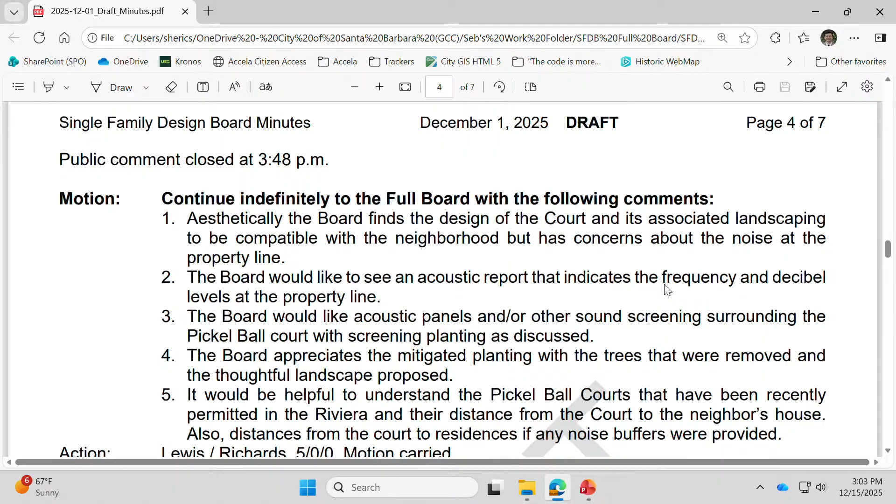Just let me know when to keep scrolling after you're done reading the motions. That looks good. Oh, I don't know, yeah. I'll second that. Oh sorry, we're going down to the other ones. Okay, to the other ones, okay. I thought that you were done. You can keep going.

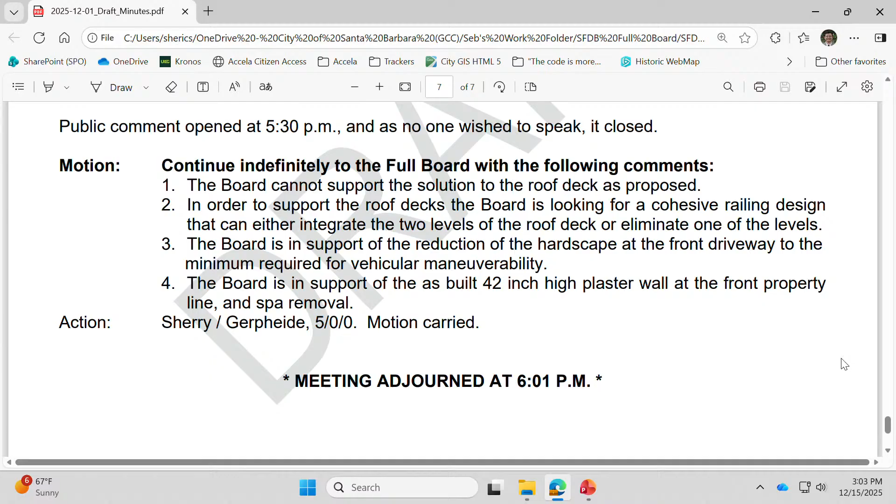Okay, I'll move to approve the minutes as noted for the December 1st full board meeting. I'll second that. Okay, we'll take a vote. Board Member Gerpheide, yes. Board Member Richards, yes. Board Member Moslehy, yes. Chair Lewis, yes. Vice Chair Sherry, yes. Motion passes.

Okay, next is the approval of the minutes from the consent meeting on December 1st.

That looks good. And that's it? Oh, one more.

Okay, I'll move to approve the minutes from the consent meeting on December 1st. I'll second. Okay, we'll take a vote. Board Member Richards, yes. Board Member Moslehy, yes. Board Member Gerpheide, yes. Chair Lewis, yes. Vice Chair Sherry, yes. Motion passes.

Next is ratification of the actions taken on the consent calendar for December 8th and December 15th.

I'll go ahead and read them from the full board agenda. Item 1 for the December 8th consent hearing, 529 De La Vina Street, was postponed to December 15th, so no action occurred at that hearing. For December 15th, item 1, 3179 Lucinda Lane, was scheduled for project design approval and final approval and was granted as submitted. Item 2, 45 West Sola, was granted project design approval and final approval as submitted. Item 3, 529 De La Vina Street, was also granted project design approval and final approval as submitted. Finally, item 4, 3022 Paseo del Refugio, was continued indefinitely to the staff hearing officer. That is it for the motions for those two days.

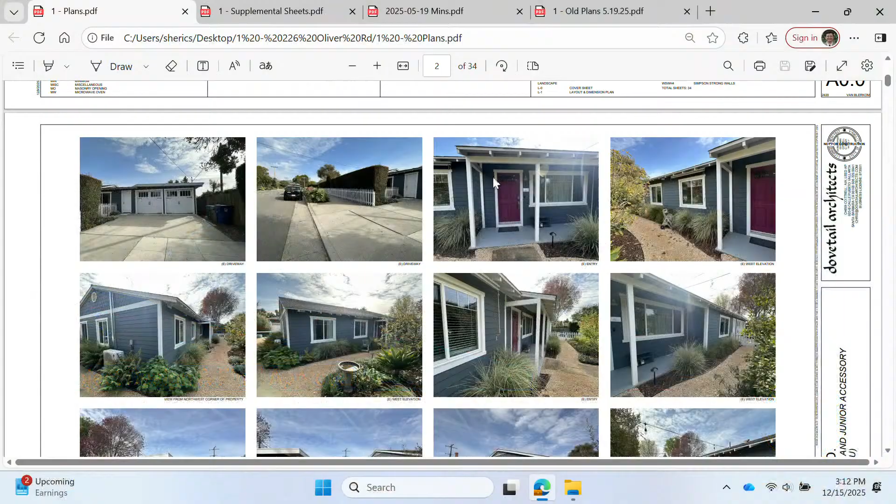So I can just take you through where we are, and then Katie can show you the minor landscape changes that we've got. Here's that existing entry. So posts are going to be in the same place, we just have a little cute little gable over that.

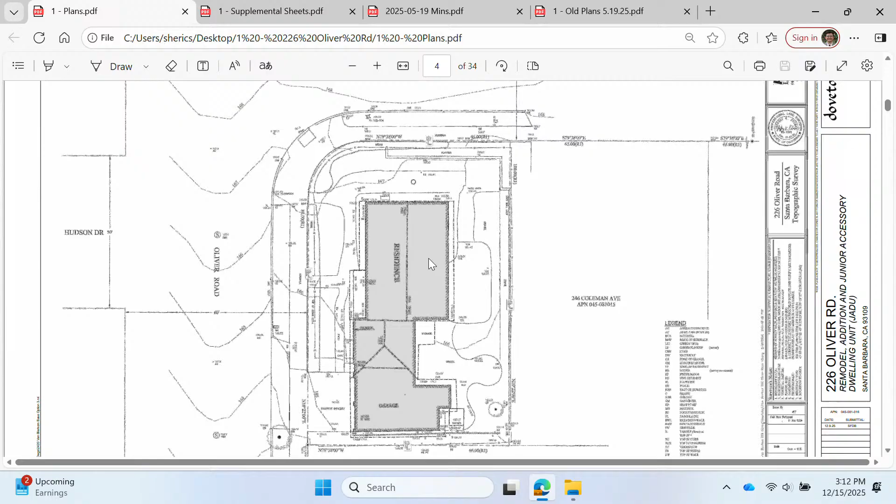I'll come back to this site plan. Well, do you have that other site plan? Yeah, I put it in the folder, it's in here, supplemental sheets? Yes, I got it, there you go. Wow, look at that. Perfect. Thank you. Yes.

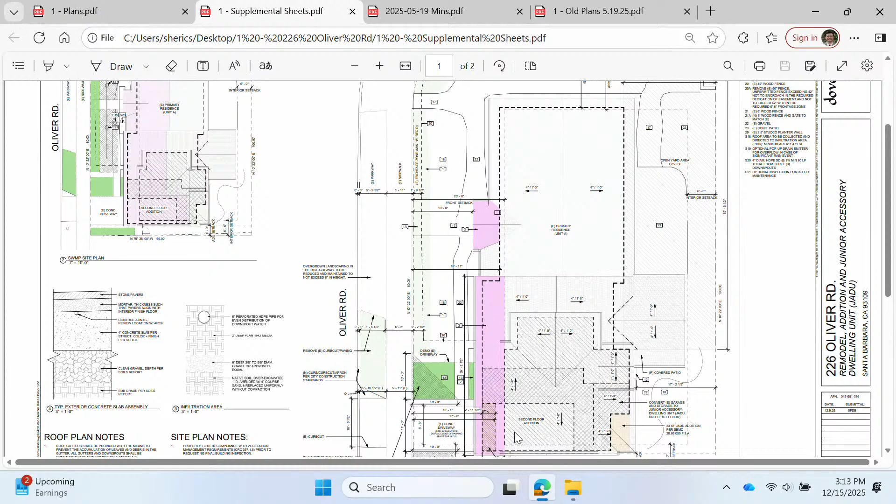I'll switch back to this other thing real quick. Okay, you can see that looked much better.

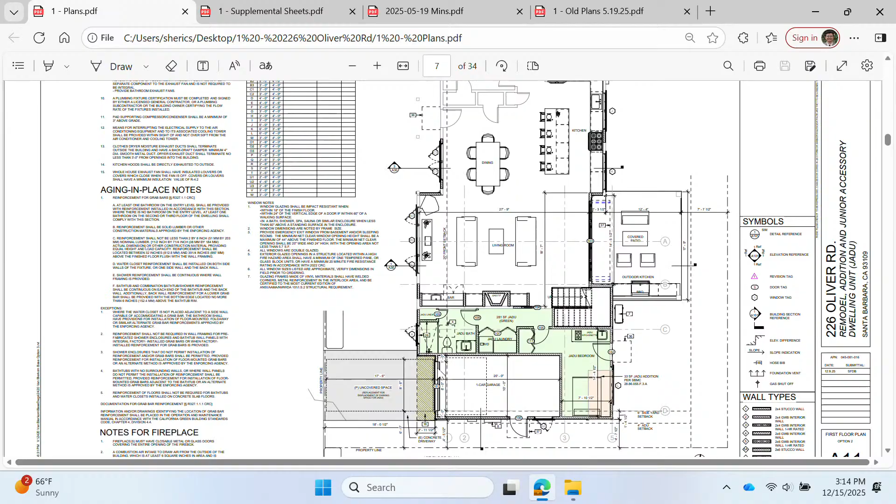Floor plans - we're doing a sort of infill addition at the back of the house, and then converting this 2-car garage into a 1-car garage and a funky JADU. And there's this other parking space in front, so there's that setback, you can see that push back there where we're getting that space. Adding a new stair up to the 2nd floor primary suite, closet, bath, bedroom. I think the last time the board was here, we had 3 by 3, and I think these have shrunk to 30 by 30.

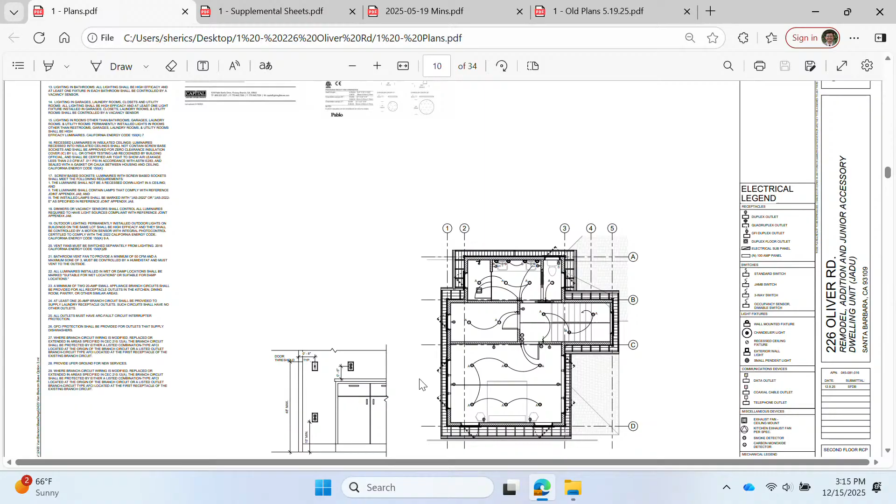RCPs. There was a comment from the folks on the opposite corner, kitty corner from this, about exterior lights, and I just wanted to show them that there are actually no exterior lights proposed on the 2nd story. There's no deck or anything on the 2nd story, so just wanted to allay that concern.

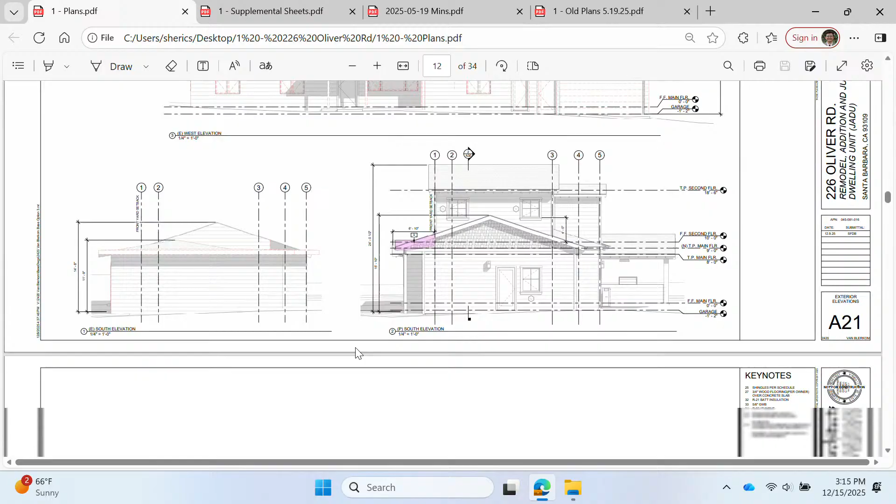I think I can, here's the side view of that. Sections. I think I'll just roll through details unless, Katie, I think you're up now. Great, do you want to drive?

So the landscape is really just reacting to the updates to the architecture. The landscape is pretty well established. If you saw the existing site photos, we're really just kind of matching the plant palette that's there and the hardscape, so we've tried to clearly show where the limit of work is. So we're updating the parkways and then anywhere where the building is changing, where we need to update the landscape.

So here's our construction plan. So we're doing tile in the back. This is existing Oklahoma stone, we're just adding more to match existing. And then same over here, we're doing Hanley Gold gravel, we're just adding more as this area has expanded to the landscape.

And then planting, like I said, we're really just matching the existing plant palette that's there. Here's the list of plants. And then the parkway sheets, you can only have 8-inch high plants now, so we're replacing with a Carissa macrocarpa ground cover, just simple. And that's all, happy to answer questions.

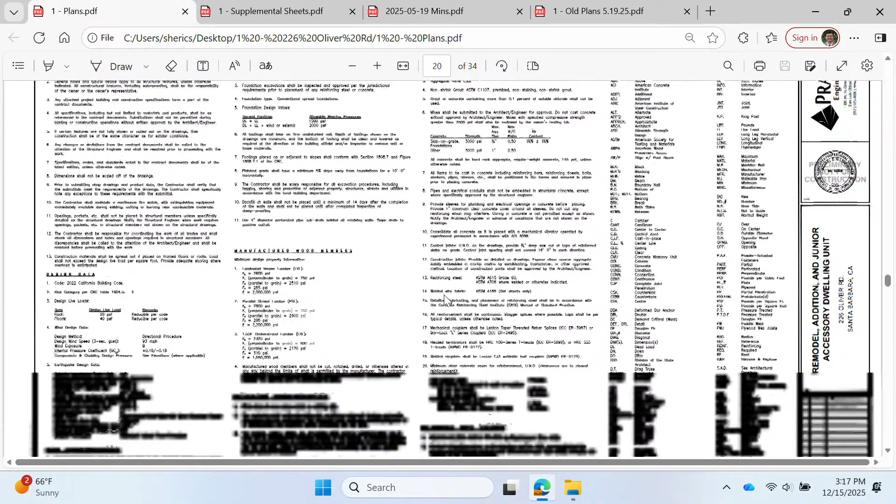I'll just show you the color sheet real quick and then pass it back to you. Well, there we go. There you go, okay, pretty neutral palette. Cloud white as the base, white windows and doors, white trim, and there's a downlight. It does have glass on the outside, but you can't see the bulb, so it's an LED downlight. And I will close it there for questions.

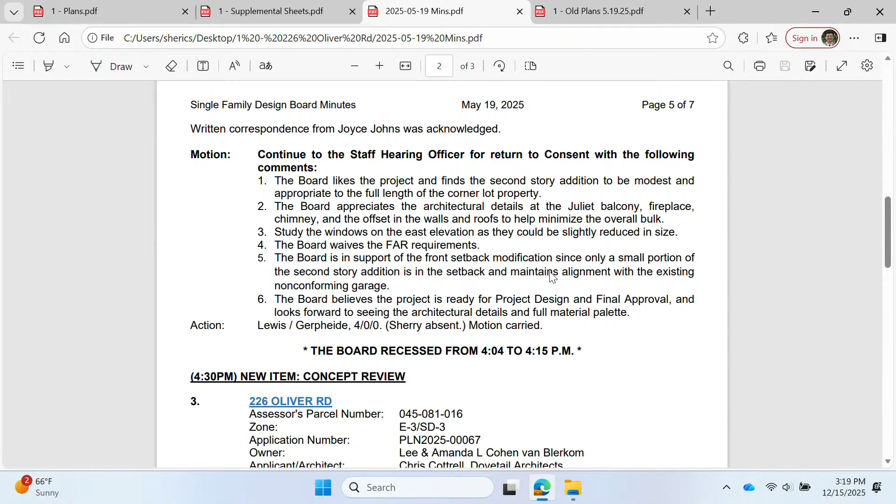So I think you had commented a little bit on the hedge and the privacy. Do you want to comment anything else for the landscaping for item 4? Is that the change? Sure, you can go ahead. Yeah, so I think the last time we were here, we had the 8-foot hedge remaining, and now we are trimming that down. So I think we're going down to 3.6 on that. Great, yeah.

Okay, we'll move to any other questions from the board? Yeah,

You're talking about the large existing hedge on the street. You're lowering it to 3.6, but there were concerns about privacy, and now we're lowering a fence? Previously, they were tall because the applicant wanted privacy, but they're the ones choosing to lower it.

Do you want to comment? I would love to comment. Part of it is the driveway, we need the first 10 feet at 3.6, and so it just seemed like it was going to be weird to have 3.6. And because of the visibility triangle. Exactly. But the rest of it you're making lower because you want it lower?

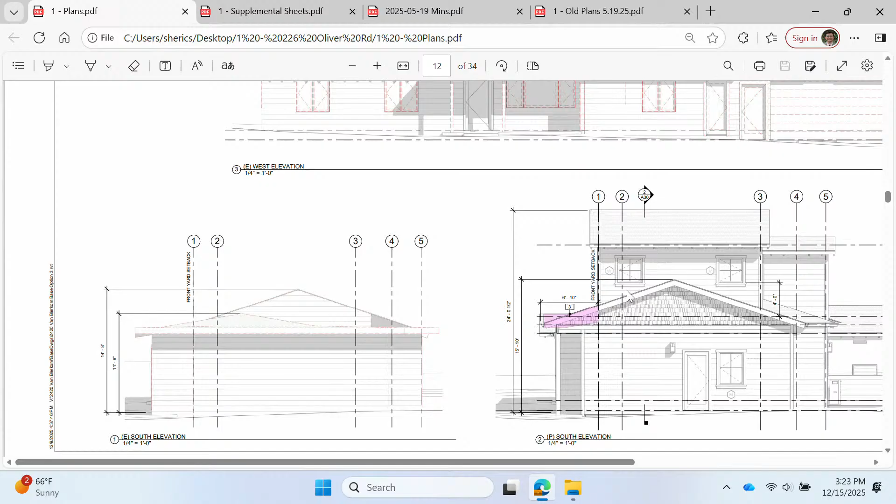And on your elevations here, you show on the walls, like where the gable is, the shingles, but on the material palette you don't have it, it's only like roofing shingle, what's the material and color of the shingle on the walls? That's a great question. Yeah, you don't have it on the material board, so I was curious.

Yeah, so both the siding and the shingle color will be that same body, so it'll be painted the same. So it's the same strategy as the existing house, which has the blue shingle and the board and batten, like it's gonna be this white. Exactly. Okay, got it.

And there are some existing, maybe I saw one downspout which is like aluminum, what's the proposed? Match the trim, so downspouts look like the trim. Okay, I think that's my questions.

Okay, Board Member Richards? Sure. I just wanted to reconfirm that these are aluminum-clad wood windows, is that what's being proposed? Correct, yep. Okay, thank you, that's all.

Okay, we'll move to comments. Anyone want to start us? No comments?

In support of the project, I was just going to chime in on the hedge height. I think we saw this back in May, so it's been a while, but from what I remember, the hedges along Oliver and Coleman, there was a backyard kind of area around the corner that was treated more as a backyard, where we respected the height being higher on the hedges. And then coming around the corner on Oliver, there was this really cute front yard, and we were discussing keeping it lower for more of a friendly view from the public, and also to keep with the zoning rules.

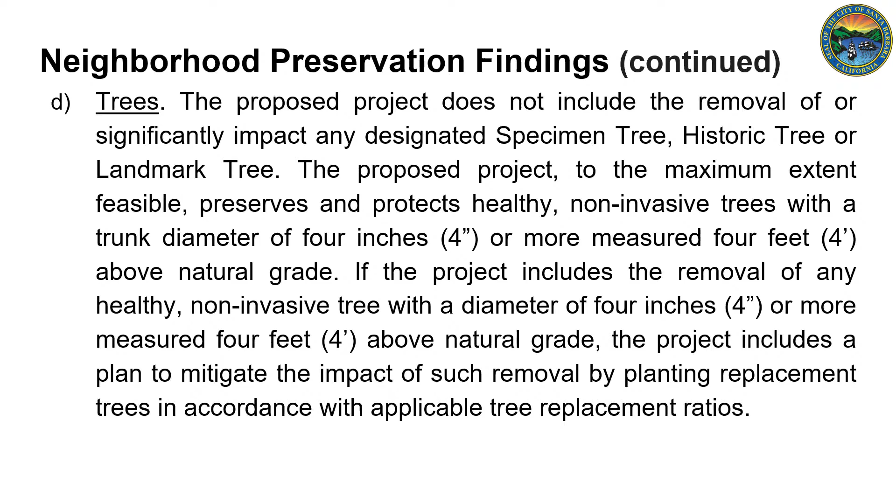With that, I'll make a motion to approve - oh, my brain stopped - to grant project design approval and final approval with the following comments: that the proposed development is consistent with the scenic character of the city and will enhance the appearance of the neighborhood. The proposed development is compatible with the neighborhood and its size, bulk, and scale is appropriate to the site and neighborhood. The proposed buildings and structures are designed with quality architectural details. The proposed materials and color maintain the natural appearance of the ridgeline or hillside. No trees of significance are proposed to be removed. The public health, safety, and welfare are appropriately protected and preserved. The project generally complies with the Good Neighbor Guidelines regarding privacy, landscaping, noise, and lighting. The development, including proposed structures and grading, preserves significant public scenic views of and from the hillside. That's it.

Do I have a second? I'll second that. Thanks, okay, we'll take a vote.

Chair Lewis? Yes. Vice Chair Sherry? Yes. Board Member Gerpheide? Yes. Board Member Moslahi? Yes. Board Member Richards? Yes. Motion passes. Okay, great, great.

It's the big change, and then I'll let Chantal talk about landscape once we get to that point. But just to address the architectural details, which was the comment from before, I'm just going to go to the render, which shows it.

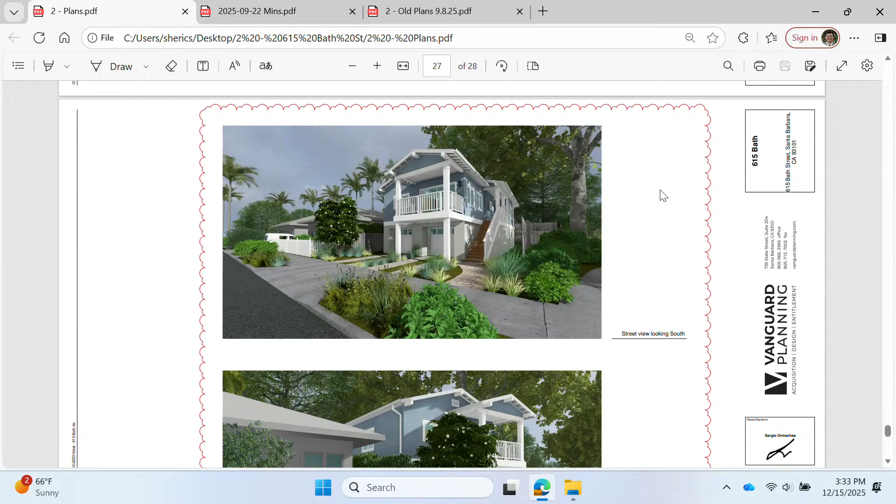In question last time was the soffit. It's tongue and groove, and it's going to be painted white. Previously, it was wood natural, which is not anymore. And right now, what we did with the deck was aligning the bottom of the joist to the floor joist of the main house. That allows us to have a continuous 1x14 horizontal trim throughout the building, which makes a lot more sense and a lot better than that step that was before.

Then the one thing that's not showing is there should be an attic vent right here, as was previously mentioned, but I think there was an error in the render. I believe that was really all the major changes. These are some specs that are not in the purview of the SFDB.

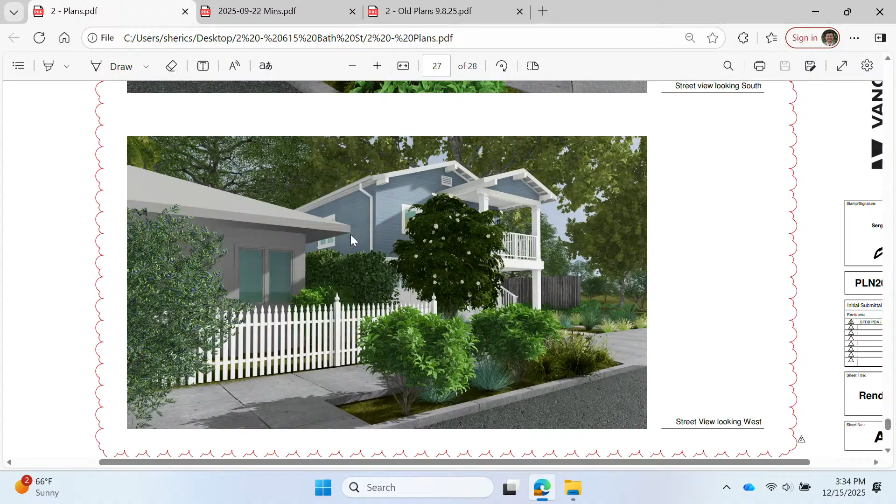And then I'll jump now to the landscape plan. If Chantal could briefly explain this. Okay, so I'll just kind of go briefly through the landscape plan.

Overall, we wanted to focus on site efficiency and creating usable space for our client, while still also relating to the surrounding environment. Like Sergio mentioned, I'll start in the front and go around the plan. In the front, we have those ribbon driveways with permeable paving and then ground cover. It'll help soften the front yard, as well as reduce impervious surfaces. And on the east side, we have a tree which will help screen the views up through the property as you're walking on the sidewalk.

We have some plants in there. And then on the west side, the front entry, I have flagstone, which I think helps create a clear sense of entry into the front entry. And then on both sides, we have gravel walkways. The west side has flagstone stepping stones, but both sides are gravel. So that kind of creates access and circulation throughout the property.

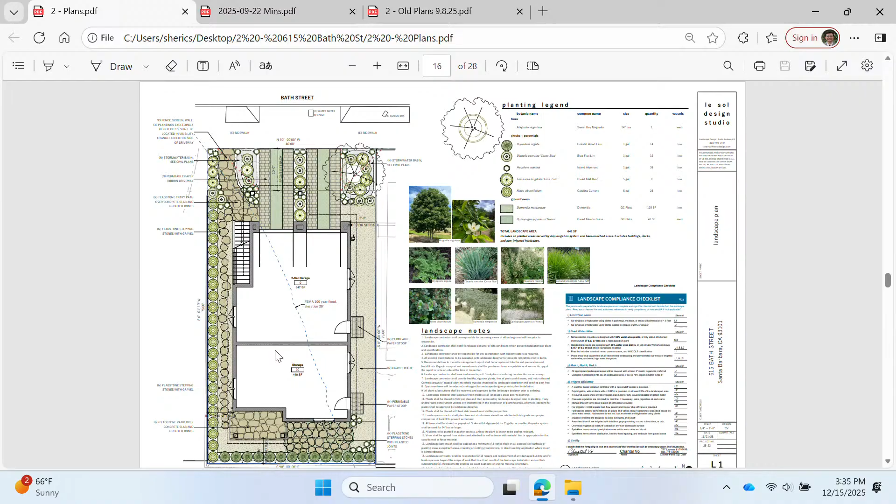And then in the back, we have flagstone patios, and portions of the patio have planted joints, so it'll help also soften the hardscape. And the plantings along the perimeter are not hedging, it's just kind of low plantings to soften the fencing and create a little bit of a separation from the neighbors.

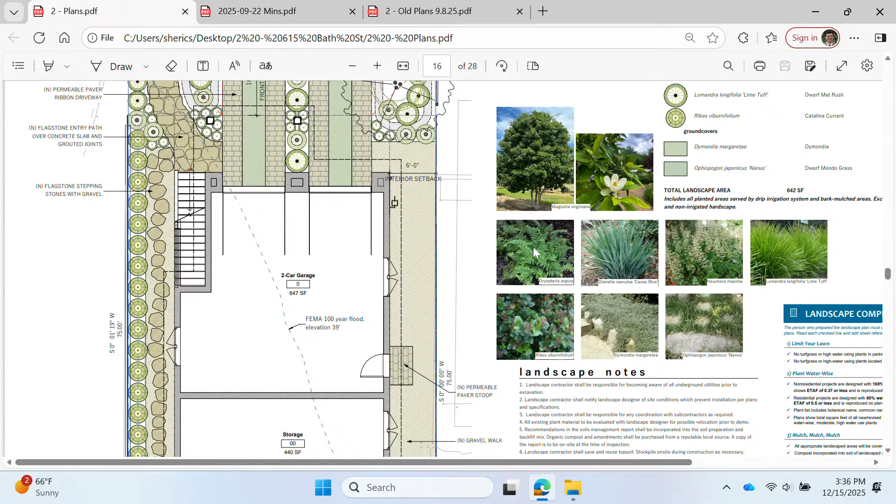And that's about it. So I'm happy to answer any questions. Okay, great, thank you. We'll move to public comment.

Thank you, Chair Lewis. I'll start with in-person public comment. At this time, I do not have any slips for this particular project. If anyone wishes to make a comment, they may fill one out and bring it to me. I see no one moving to do so. We will turn our attention to virtual attendance. At this time, I do not have any hands raised virtually for comment, and we did not receive any written correspondence for this particular project. So at that, I'll turn it back over to you, Chair Lewis.

Okay, great. We will start with questions. Any questions from the board? Did you say that the front elevation gable at the covered porch was missing a vent? Is that what you said? Yes, it should be there in the render, similar to the other larger gable.

And then the other question was about the existing sycamore tree that's right on the north side of the property line, closer to the front. You're talking about the neighbor's tree? Yeah, that one, on the neighbor's property. That one is not going to make it. I was just wondering if you had somebody look at that, an arborist, to give you advice on how to build a foundation that close to the critical root zone.

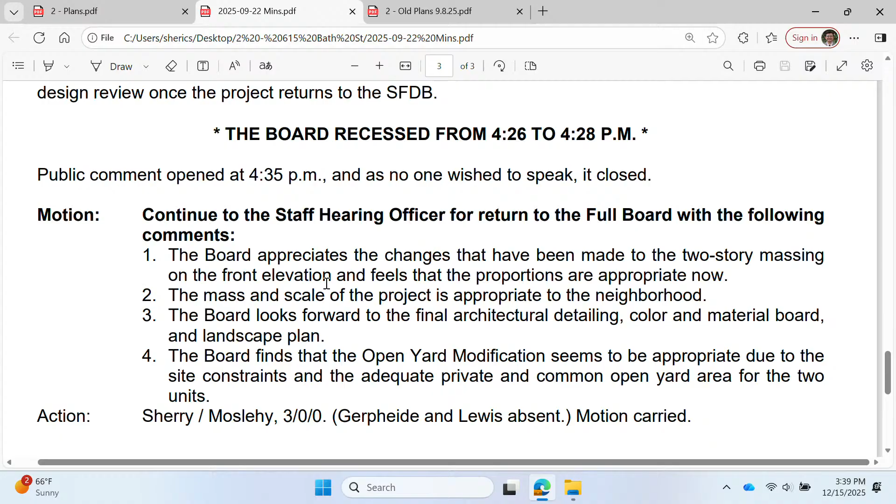Okay, no questions. Board Member Moslehy. Yes, can you show us on your old plans the horizontal band that goes around the building, and the current one, please? Is your microphone on? I just turned it on. Like a side by side, you can just show the old one. We just saw the new one.

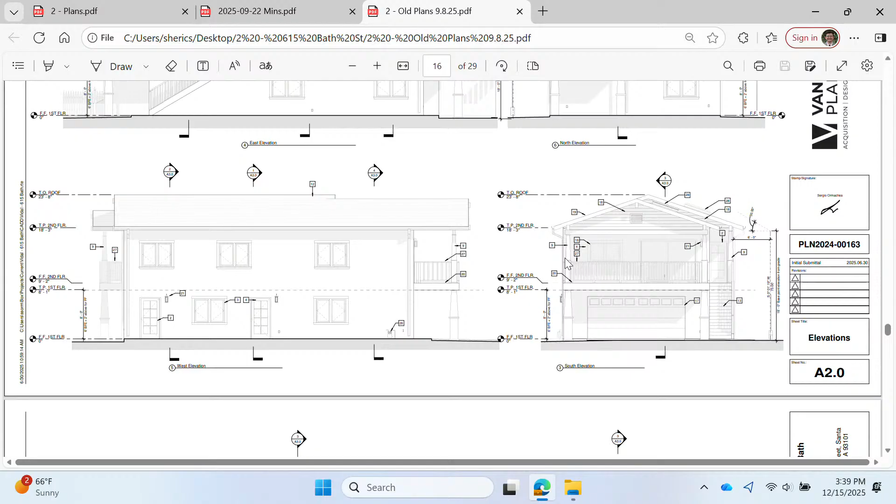I'll go to the elevation. Previously we didn't have it there. Oh, this is a really old plan where we had a big one. Through the chair to the applicant team, when I was putting the files in this folder, I accidentally put the earlier hearing of the plan set, but I can bring up the September 22nd plan set for you right now. Well, one thing, I think I know what you're about to ask us. Why don't we just show you on our current plans what we did?

I think the current one is perfectly done the way that we wanted. I just wanted to go back, and this is kind of to show a little bit. Before it was this skinny little guy, and then you could see based on this dash line how it was extending further down, and that was the discrepancy. There was like a step situation. Yeah, and also if we could look at the render, it was in this transition point where this was in one plane and this was in a further plane, but now they're coplanar, so it's going to be one. They were also different vertical thicknesses before, and we were able to get them to be the same.

Okay, thank you. Is there any change in any windows since we last saw the project? No. Okay, no, thank you so much. That was all my board questions. Member Richards? No questions. Okay, any comments from the board?

No, just the one about the tree, and I understand the situation. I just wish it wouldn't have to come back. I think our motion is going to be with the understanding that that tree isn't going to be removed. I take it, it's assumed. Yeah, this is a tricky one. It's outside of their site, so I don't know that.

So I don't know how staff deals with that, but through the chair, they're here for final approval. If they need to make a change to the foundation system that actually has a material effect to the design, they could potentially come back as a review after final, if you wanted to grant it, with the understanding that they're not touching the tree on the adjacent property.

I could speak to that real quick. Any changes we make about this wouldn't affect anything above the ground on this building. It would purely be whether it has a continuous footing or a grade beam, and that won't change anything that anyone can see. No, I know that, but it has to do with the aesthetic change above grade, that the architecture is now not going to have that significant tree there as a softening effect.

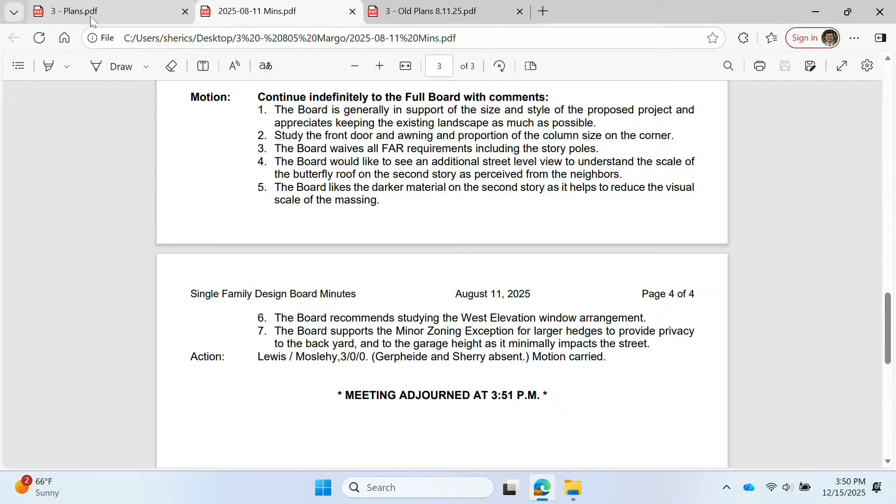So I'll start going over the plans, and we'll probably do a little bit of back and forth to compare what's changed between this submittal and the previous submittal. In general, the footprint of the building has remained the same in the design, and we've made some minor adjustments.

If we can reduce noise in the background so that we can hear the applicant, regarding the detailing of that front entry as well as some of the windows.

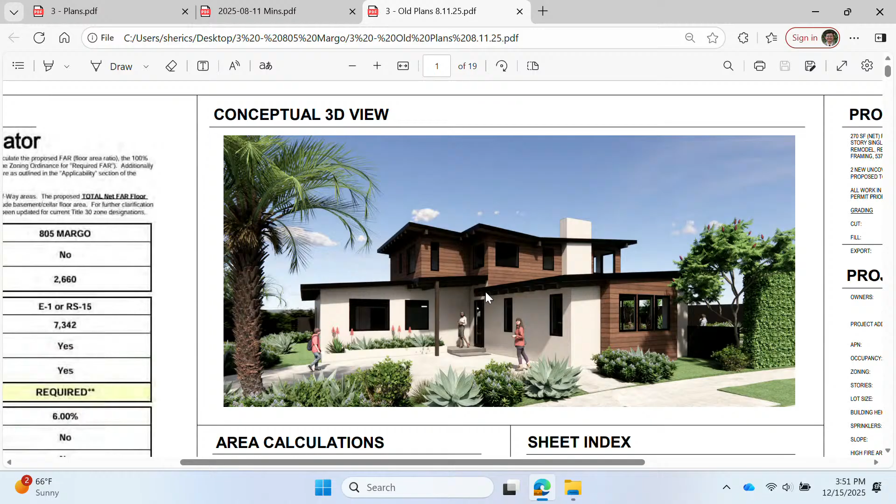So part of the comments were about the scale of the post coming down, and then the change in material as the wood kind of abruptly stops at the corner. To address that material change, we actually brought that wall out a little bit to create a change in plane so that we could continue the wood down at the entry and create a feature there. We also increased the size of the wood framing at that entry, as well as integrated it with this planter element that's going in front of the building.

And the planter partially serves to, since we're proposing parking in the driveway area, protect the house from that parking. That's usually coming up as a planning comment, and so that was partially to address that as well.

Let's go to the elevation on the new plans so we can take a look at it. This is the elevation of that roof coming down over the entry and the post there, integrated with the planter. Then the street level view from the neighbors.

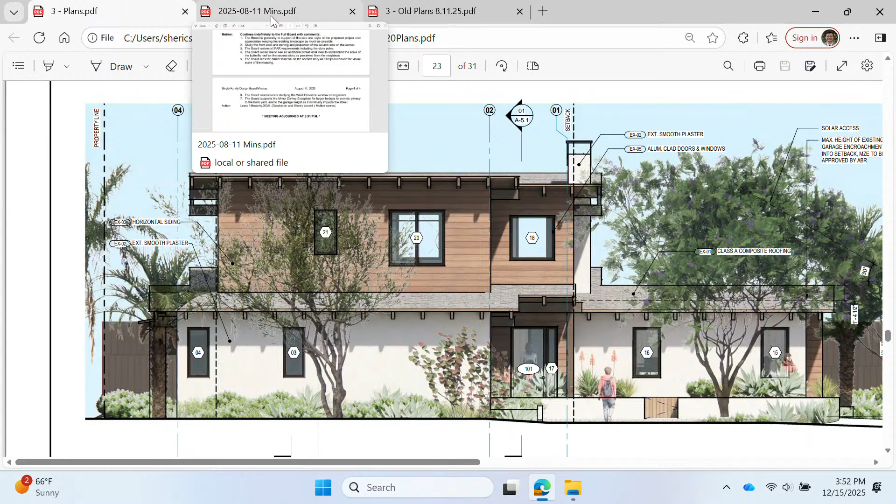We provided a new street elevation. As we discussed during the previous hearing, the street actually slopes down significantly along Roberto. So we prepared a second street elevation to illustrate that relationship between the topography and how the proposed building sits in context of the neighborhood.

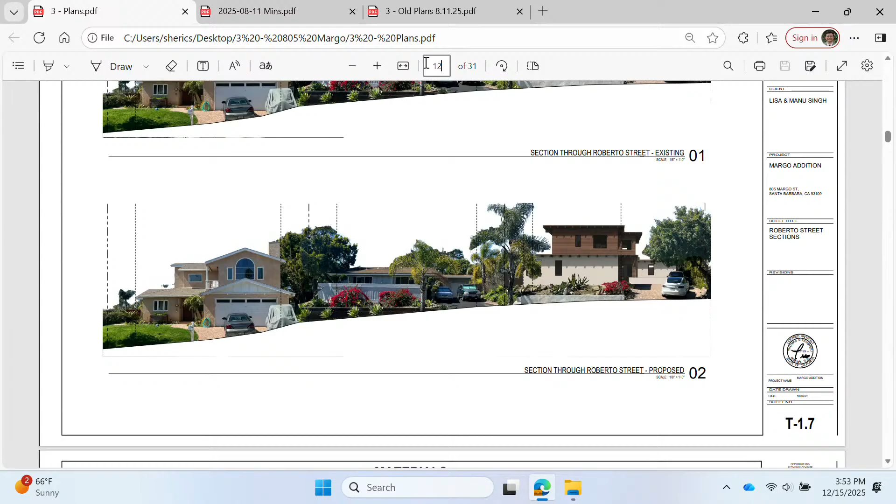We also have some additional views from the street, showing how the street is sloping up and how the building sits. This is along Margo, which is a lot flatter than Roberto. So just a few additional views there to illustrate the massing of the building.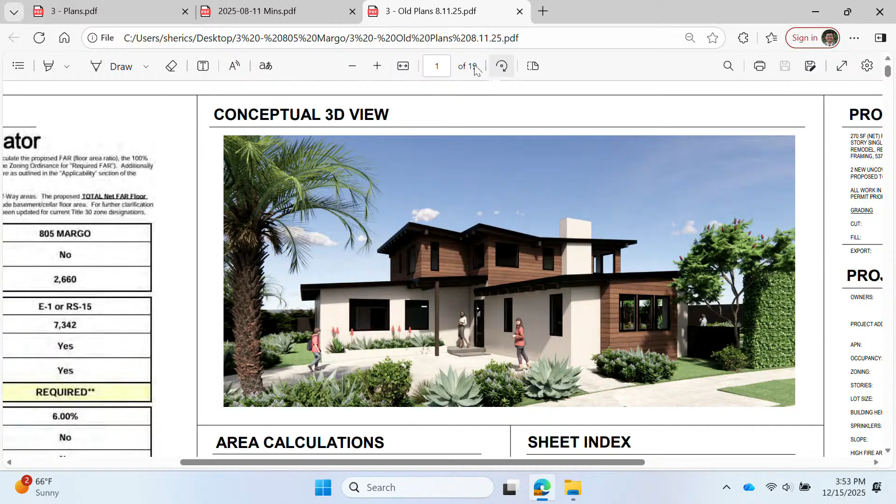Comment number 6 was about the west elevation windows. Let me pull up the old plans on this too, although I'm not sure what page it's on. Okay, so we had kind of a continuous, very repetitive string of windows along the side of the building.

This portion here is above a double height living space, and over this area is the master bedroom. So what we did on the most recent set was break up those two elements, which worked out well since we could create an operable window for the master as well, separating them into two different areas so it didn't look so monotonous along that top level.

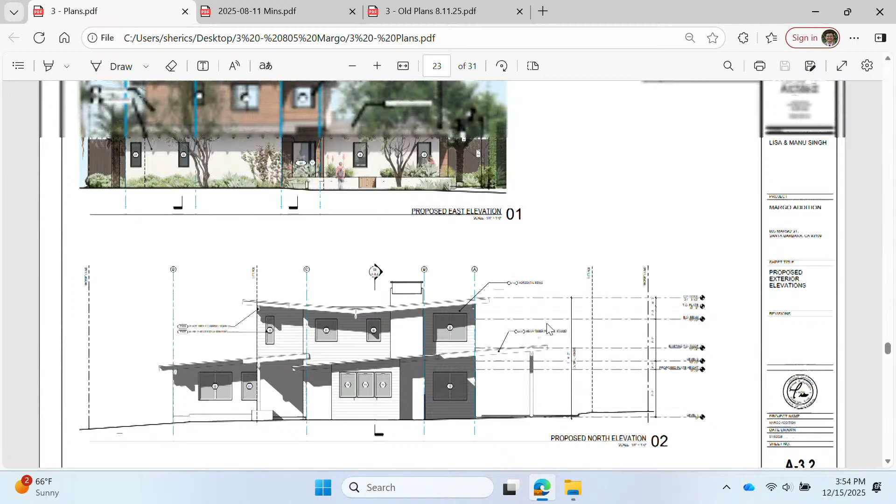We also made several other changes to the windows, most of which are pretty minor, but a lot of them relate to adding operable windows where we needed them, and aligning as much as we could the sills and heads with the butterfly roof.

Our approach to the window design was to step the windows as much as we could to relate to the roof, not so much to have that continuous band. But since we do have rectangular windows, some that are closer to the edges where the higher roofs are occurring are a little bit taller to capture more light.

There was also a question about the height of these windows during the previous hearing. The desire was to keep the windows as large as possible along this edge, partially because you can't look out of these windows, so it's mostly to provide light to the interior of this double height space.

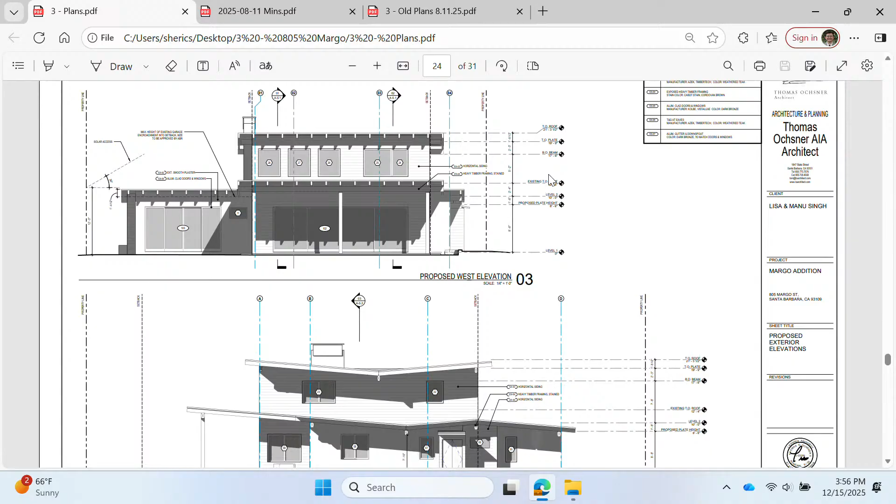We also have a few other exhibits from the previous hearing about the master bedroom and views from the master bedroom towards the adjacent properties. Let me see what I have on here, I can't remember which sheet that's on. These are the exhibits we prepared as part of the previous submittal as well as this submittal.

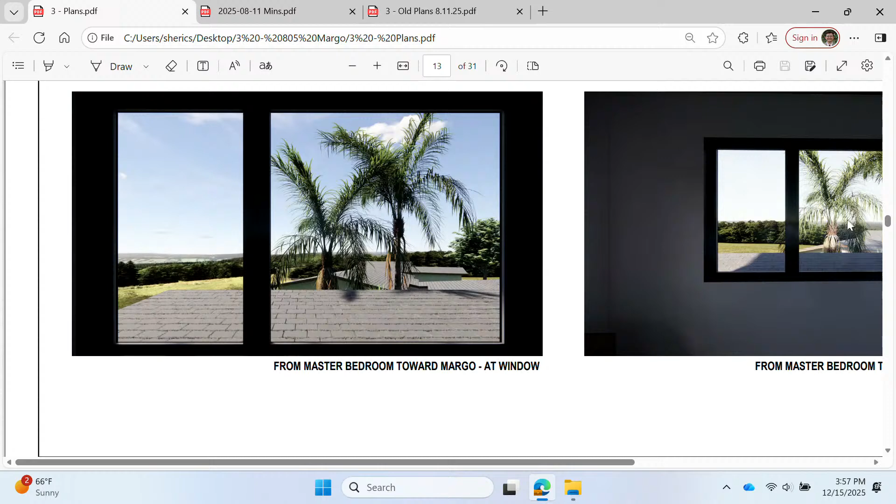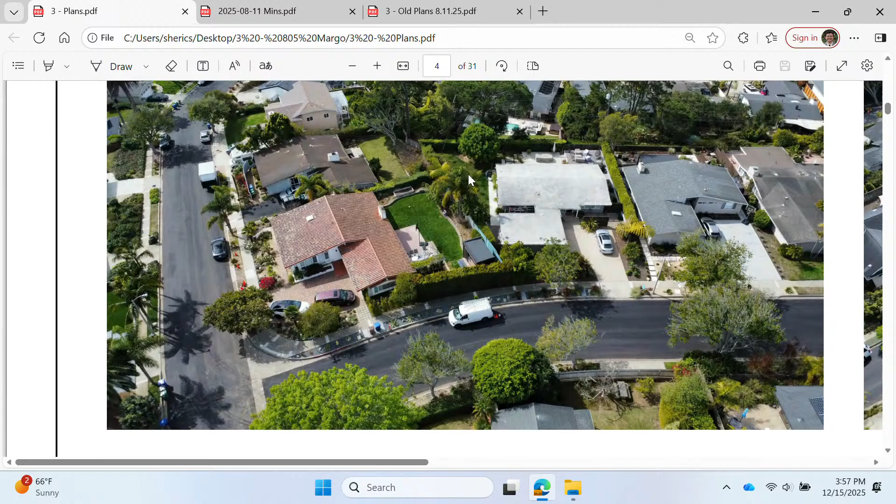Our approach to the site design of this project has been to maintain as much as possible of that existing landscaping. We're not proposing to touch much of anything, and the majority of the development is happening over the footprint of the existing structure. You can see this little cluster of palm trees and other planting along the back of that property.

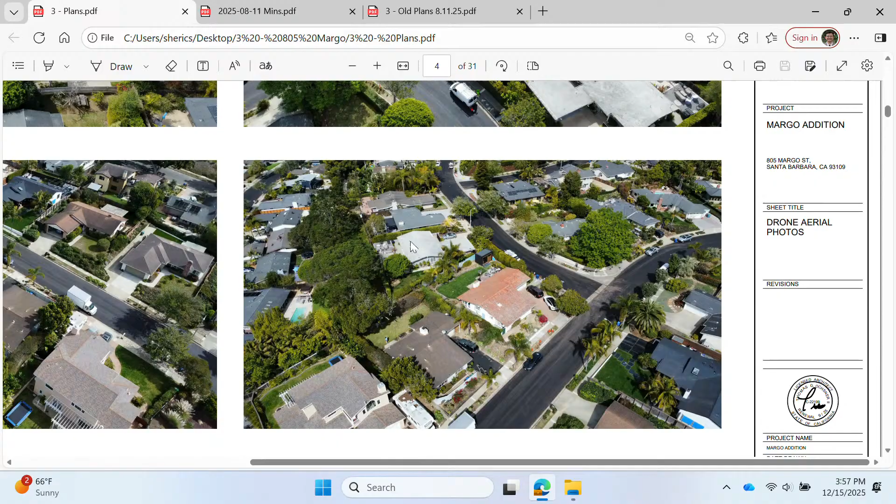Tom has already met with a neighbor at this property to discuss. The neighbor was also concerned about shadows being cast on the property, so we prepared a solar study that's part of this submittal to illustrate the sun relative to the location of that structure. You're not going to have many shadows cast except early in the morning, which is really the only time of day you'll have shadows going in that direction.

Later in the evening, the shadows actually cast towards the street instead. We just wanted to prepare that exhibit to provide the neighbors with some additional information if they need it.

To reiterate from the previous presentation, the site design of the house was based off the existing footprint, and we're making some adjustments to the existing garage roof as we convert that to a JADU structure. The overall height of the butterfly roofs, what we always strive to do is keep roofs below 25 feet, and the top edge of this roof is at 21 foot 6.5 inches from grade.

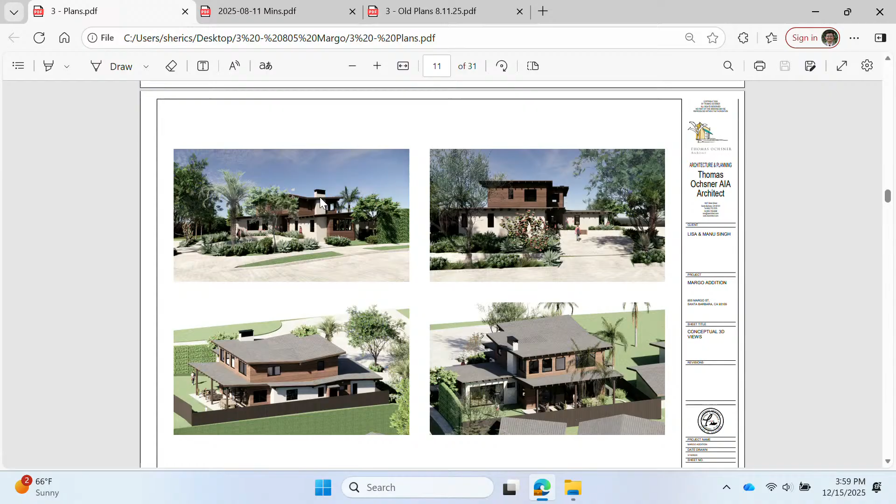We also met with the Transportation Department as part of our application process, because there were some public right-of-way improvements that they encouraged for this property.

It's a little tricky because we have a corner lot, and the hedge along Margo Street, the taller one we're asking for a zoning exception on, is actually providing privacy for that backyard and is in keeping with other residences in that area of the neighborhood. Part of the improvements the Transportation Department was requesting would have affected that hedge, so we were able to talk to them about providing a bulb-out at the intersection, which would provide additional accessibility to the sidewalk area rather than widening the sidewalk and bringing it onto the property.

So that was another change that we worked with Transportation and Planning Department to utilize, and then also showing our parking spaces in that existing driveway there as well.

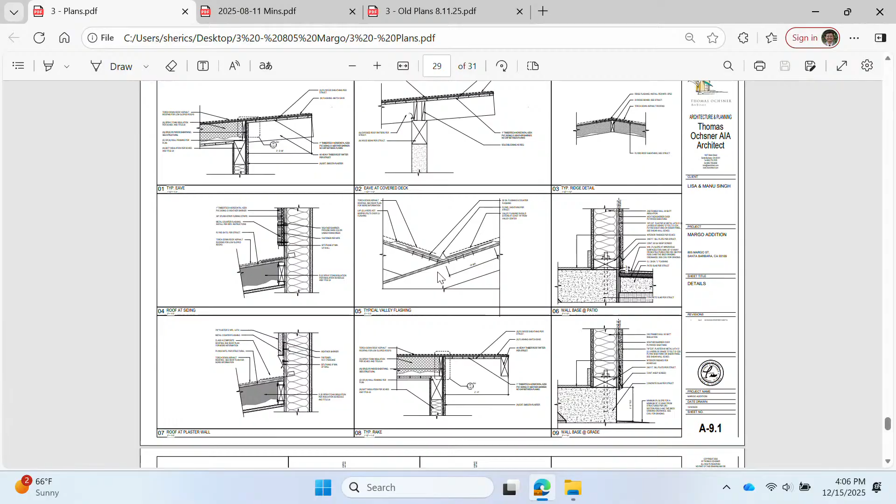Do you mean what the slope is? Yeah, I just want to get a better understanding of what the slope is and what the roofing material is. I believe it's either a 2 and 12 or a 3 and 12, but I know it's relatively low sloped. Let me go to the roof plan here. Oh, it's actually 1 and 12, so.

Okay, and so the roofing material that you guys are looking at using? I was originally thinking that it would be some sort of asphaltic roll material, but they do want to put composition shingles over it, and that's usually what we end up doing with a really low sloped roof. If you're going to be looking down on it, we'll provide a torch down underlayment and then shingles on top to provide something more aesthetically pleasing to look at, because that master bedroom does look out over the roof that's covering the deck below. So that's the current plan.

Okay. And then I guess as a follow-up to that, gutters and drainage. It looked like on your previously submitted plan, you had a fascia that kind of wrapped the entire piece. It looks like it was deleted on this. So I'm just trying to get an understanding, because a butterfly slope, you're pretty much targeting water to one direction, and I don't see any downspouts or anything.

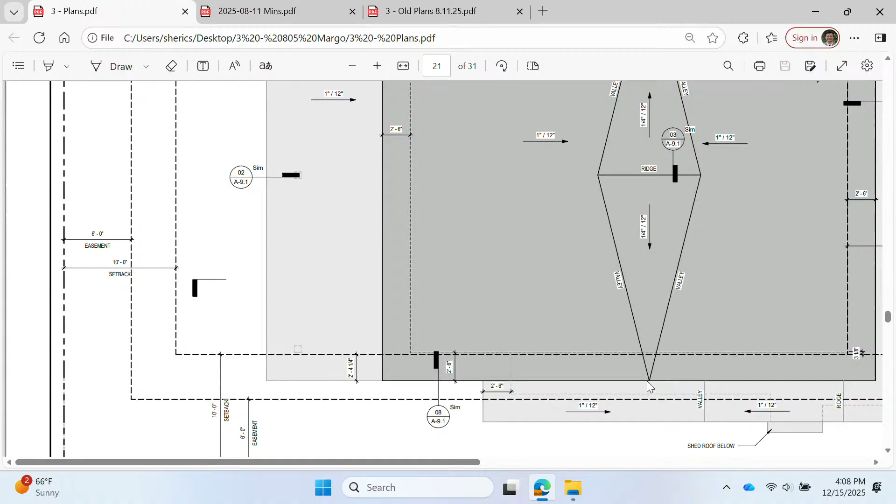Tom and I were discussing this earlier today. I think this is a tricky condition. The one thing that we were talking about doing was potentially providing a drainage area that would route down the walls, and then we would have an overflow at the edge of the butterfly, which would either have a chain going down to the roof below, but not a gutter. That's something that we were planning on figuring out for final.

Okay, and then I guess the last is just that follow-up on the fascia. It looked like just one, it was deleted. I don't think we had it on the last one, you know what it is? It's just that the thickness of that upper element was kind of overrepresented in the previous set versus now showing the true detailing of how we would do it. So instead of it being a thicker element above, because the beams are still exposed, it's just that the previous way the elevations were represented is not how we would actually detail it. So we made that adjustment.

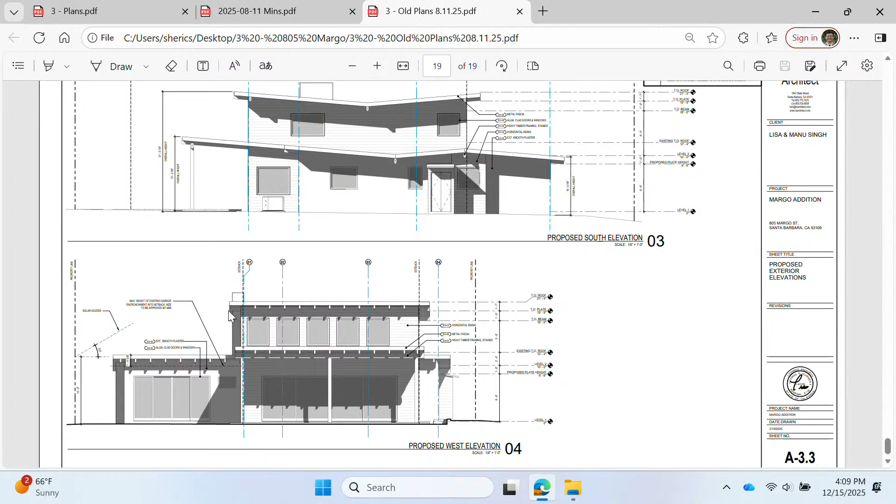For the downslope areas, would you pick up an exterior gutter, or how are you kind of dealing with the water at that point then? Because it does almost an M or N shape, right? Yeah, again, we're planning on figuring that out for final. Okay.

And then I guess the last one is looking at the proposed plans. It seems like your edge detail on the roof for the sides varies with where you actually have those roof rafters, which leads to an inconsistent shadow line and everything else kind of just being developed. Is that something that was intentional, or is that just a modeling issue?

I think that ultimately there will be a barge at the edge of each eave, and so I can see there may be some locations where it's offset from that, but the intention would be for the eave to align with the face of that, for a consistent detail. Yeah, okay, thank you.

Those are all my questions. Okay, Board Member Mosley? Yeah, sure. Can you go please to your sheet T1.31?

Just clarify the height, I think like it's visible on image, the bottom, like number 3, between the neighbor and the Roberto, like the 731 and your property. What's the height of the retaining wall and the wall, like in total?

Let me go to the elevation, hold on a second. You're saying this wall between the neighbor and... Yeah, on that sheet, you had a rendering showing it now. It's just shown as grass on the renderings, but it's probably a retaining wall visible, not grass. It's shown as green now.

Yeah, I understand that. I mean, we're not going to model the entire neighborhood. I understand. Just wanted to know the height of that in total.

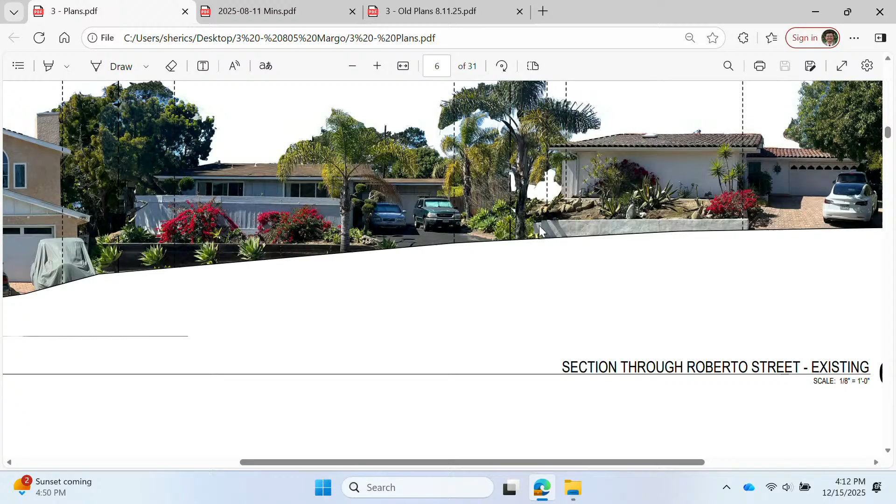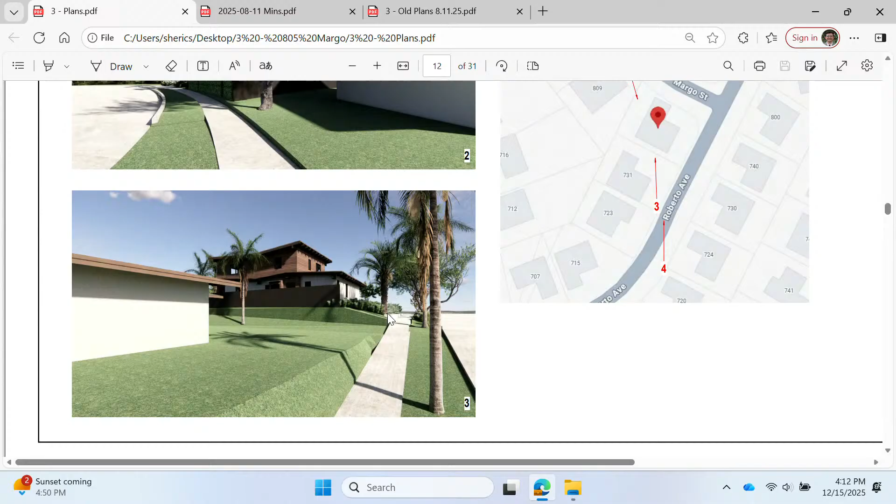From this side of the property to this side, or which total are you looking for? Can you go to that number 3? You're asking for the visible side of the retaining wall, yes, but it looks like the landscape slopes from the neighbor. I think, from what I can see from the images, it's about 3.6, maybe, is that retaining wall between those two properties, or somewhere about there.

And the same, if you go to the image number 2, zoom in, there's no... because one of the neighbors mentioned between these two properties there's no level change between the property. I don't know about 809 and 805, if there is a significant level change, but let me go back to the site photos and see if we have anything that shows that.

I just want to clarify visually what will be visible there. Yeah. So this is that street along between, and then the corner lot where the project site is located, and then the neighboring parcel at 809 Margo. It seems like it's dense. I don't think there's necessarily a significant differential, but I guess there could be a foot or 2 feet. I'm seeing it on the Google Earth. It seems like it's dense landscaping there, so there's no elevation change visible.

Can you show us this one, is this to the neighbor on the Margo Street? Yeah. Can you show us the other one as well on your section? Sure, I wonder if I might have a section from that side. Yes. You can go to that T1.32. Just, okay, and that one. Okay.

So this window here, we pulled it to the corner as much as we could so that it wasn't directly facing into their backyard. So when you're in the middle of the room, which is the majority of the time, you're going to be looking outward, and you can't see very much of the yard. If you're standing right up against the window, yes, you can look into the yard, but the majority of the time you're not going to be standing right at the window.

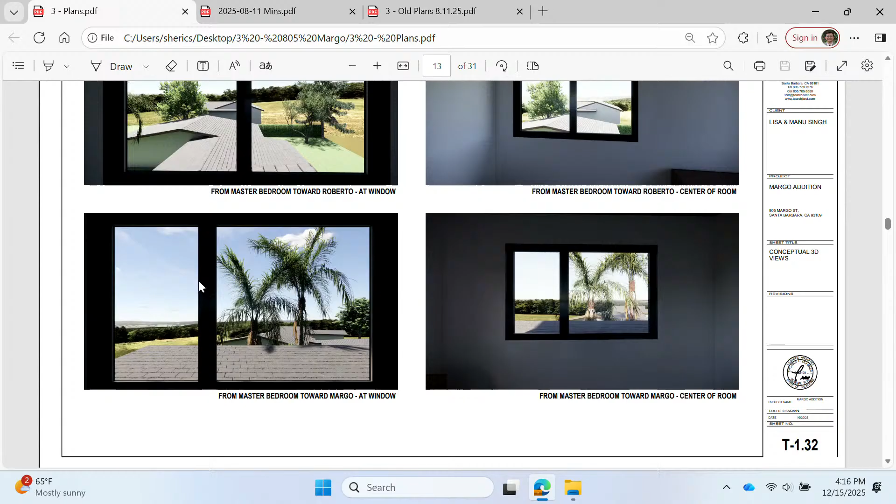And so that was kind of what we were representing here, was standing in the middle of the room versus standing directly in front of the window.

Okay, thank you. My last question would be about the planters proposed between the parking and the house - is it the same material as the exterior walls? Right now it's shown as plaster, but I'm thinking about potentially doing a cast-in-place concrete wall, so it may change. Okay, we can talk about that in the comments as well.

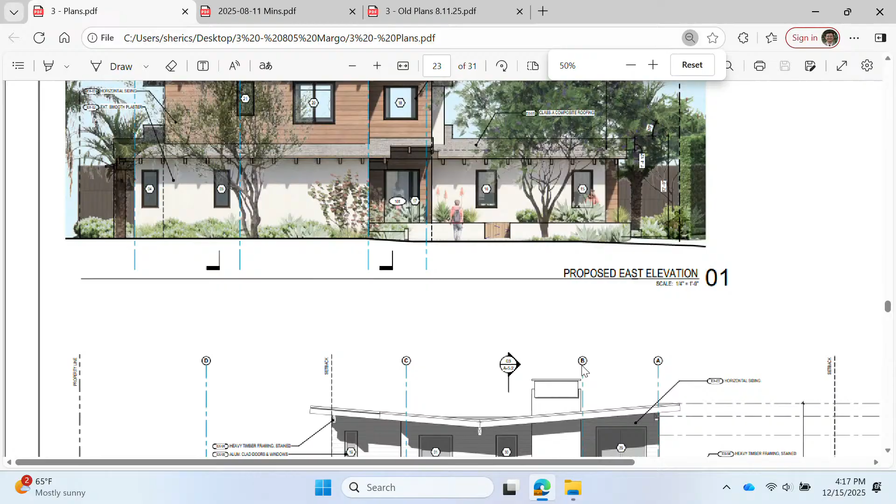And do you know how far from the neighboring property lines the second story building is? How many feet from each, on Roberto and Margo? For the property on Roberto, it's roughly 10 feet 2 inches. The setback is 10 feet, so we were just maintaining that setback - it's a little bit farther in, but essentially at the setback line. For the property where it faces the rear yard towards Margo, it's 31 feet to the property line between the two properties.

And then it sounds like you're maintaining existing vegetation. The shed that's going to be removed - is there any new vegetation, or is there no new landscape proposed? There's no new landscape proposed, although we will be putting plants in the new planter area. But other than that, we haven't discussed any new landscaping. I don't know, we may just leave that as a pad out there if there's an existing pad.

Okay, let's see - sorry, why are you not considering doing new landscaping, or you just haven't gotten there yet? No, it's just because most of the development is over the existing building footprint. We're trying to maintain as much of the existing landscaping as possible to keep the scope of work manageable - this is already a big project.

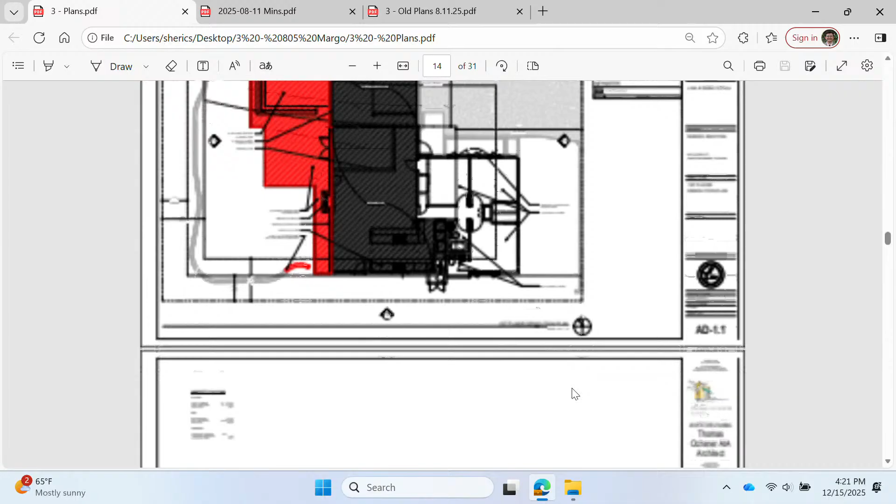I'm not sure where that's shown. Oh, here, there's a good dimension. So, 12 foot 10, but that's to the roof line. So from the wall, that's coming out 9 feet from existing, and then another 12 foot 10.

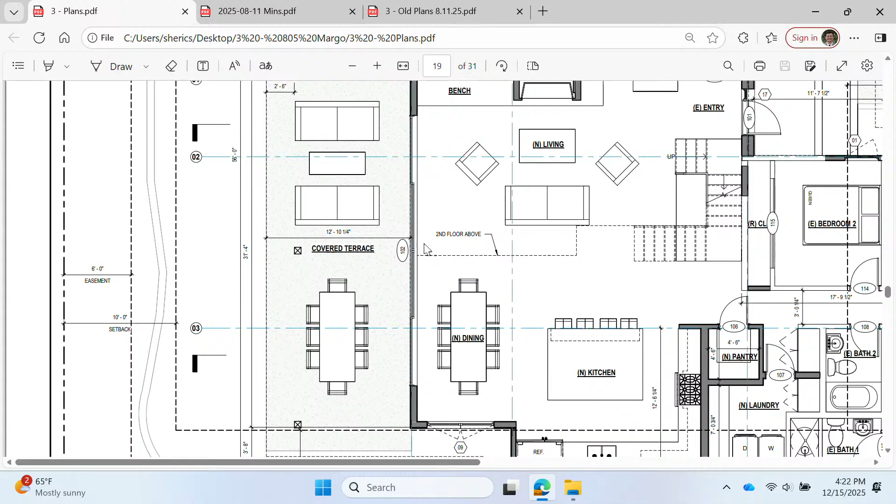So go back to that really clear aerial. And their backyard is beyond the green, beyond the property line screening, those trees? So yeah, it's 30 feet from the property line, and then there's a group of trees, and then the neighbor's yard starts. Okay, thanks. And you said deck, but did you mean— Oh yeah, patio. Okay, yeah, great.

I don't have any questions, and comment-wise, I feel like the improvements you've made since receiving comments for conceptual design have been beneficial. I think pulling out the elevation at the entry works really well, bringing the wood down to the first floor. Even just marking the entry, I think it works well, and making the post larger and more substantial. I think when we see the drainage details and eave that you're going to get to in final, it will be really lovely.

I do want to address generally that second stories are allowed, and what we prefer, as in the guidelines, is for that second story to be placed as centrally into the building as possible, so it reduces the overall visual mass of the building, which you've done. It also, in stepping back, provides extra privacy and distance. But as neighbors, you will see your neighbor's house. I think the 30 feet is more than reasonable, in addition to the screening that's there. It's a tricky lot, a corner lot—if it were anywhere else, it wouldn't. Your backyard backs up to another backyard, and that's the location of how the lot was already arranged.

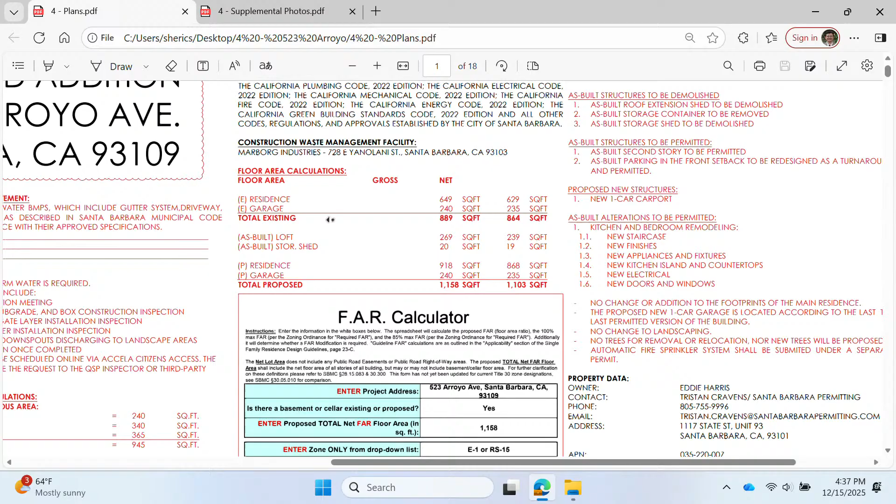So we'll start here on the project information sheet. Something I would like to point out, Sebastian did help me out with explaining the situation with the turnaround and carport. Those two items we are not current, we're working on changing those based on the feedback letter we got in November.

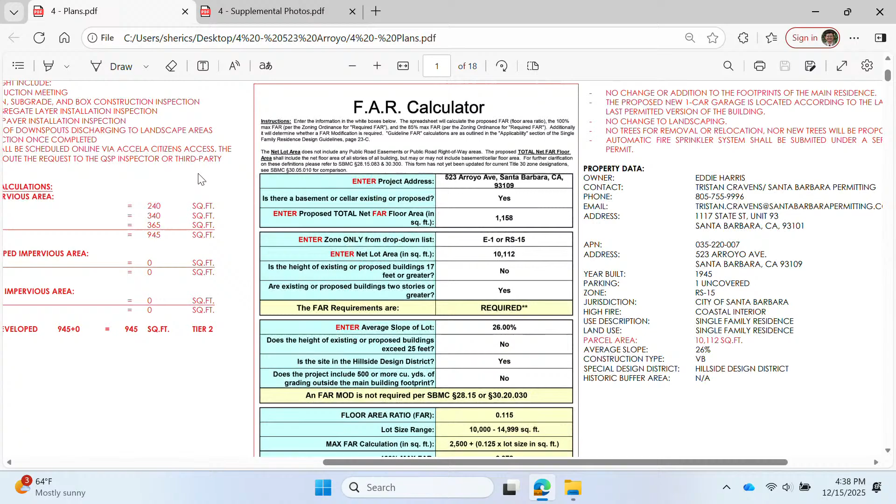But one thing I would like to point out here is the floor area calculations. So the existing residence is 629 square feet, or 649 square feet gross. And the as-built addition adds 269 square feet total. So the total proposed is 1,158 square feet, which is, I believe, about 31% of the maximum FAR. So it's a pretty minimal addition all in all.

And I'll go ahead and give you a better idea of what it looks like from the street. Here are some neighborhood photos of Arroyo Ave. Down here somewhere is 523. This is what it looks like from the driveway, from the street looking in. You can see there's this big shipping container here, but ignoring that, the actual addition is blocked by trees, not visible from the street unless you really look in there. Overall, the impact is pretty minimal.

But I'll go back to the plans here so I can show some more detail. These are the photos of the addition. As you can see, the materials are matching. It utilizes materials which match the existing residence, specifically horizontal siding, shingle roofing, so it blends in pretty seamlessly with the existing residence.

We have here on this sheet the existing site plan as well as the archive site plan, and there's a few differences I'd like to point out. The archives were pretty limited in what they showed. One being the property lines shows rectangular in the archives, whereas existing on site it's a bit different, as you can see. And then also existing is a covered porch here. The archive site plan, our best guess, it was done a while ago.

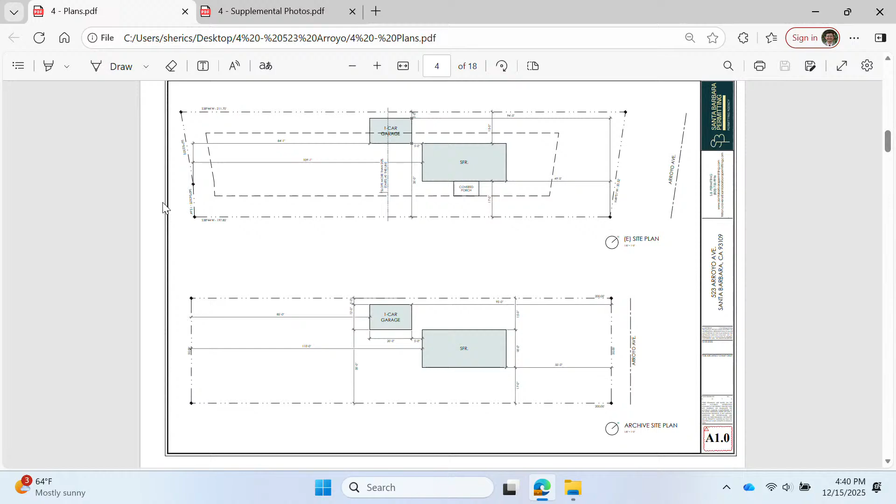It was permitted and mostly represents site massing as opposed to much else.

This was what we had originally submitted. As Sebastian noted, we will not be proposing this turnaround, and we are actually still working on where the carport is going, so this is all subject to change. But really, we would love to gain feedback on the second story addition, which will show some of the elevations.

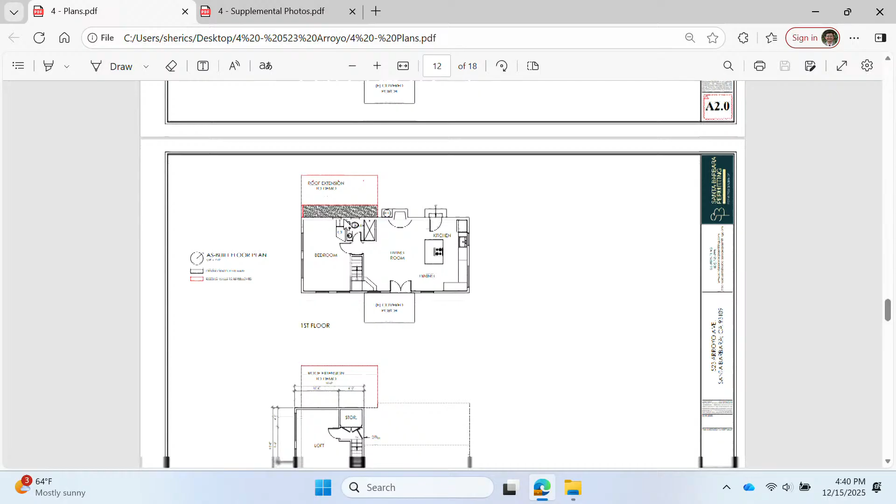These are the existing and archive floor plans. It also shows what is proposing to be demoed. And the as-built floor plan, so this is what the floor plan currently looks like, along with the second floor here. And then here are the...

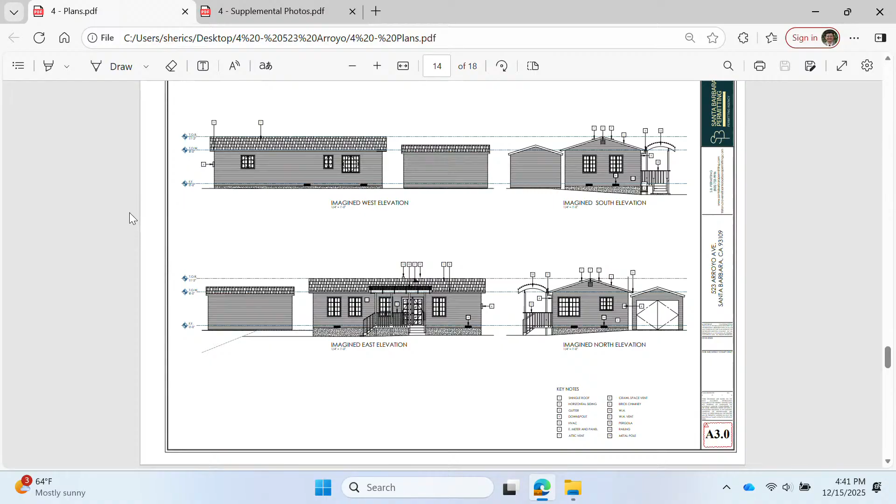What we believe were the existing elevations, so this is before roughly 1992. And then these are as-built elevations of what it looks like now and what we are proposing to keep. So as you can see, the second story addition is also in the back of the main house, further from street view.

I do want to touch on topography too. One of our goals is to not touch any existing trees or landscaping on site. That's why the note on the driveway and turnaround is important, because we want to, and the carport as well, minimize anything to do with landscaping. We don't propose to touch any existing trees on site or foliage. One thing to note too is that there is an existing drainage system on site.

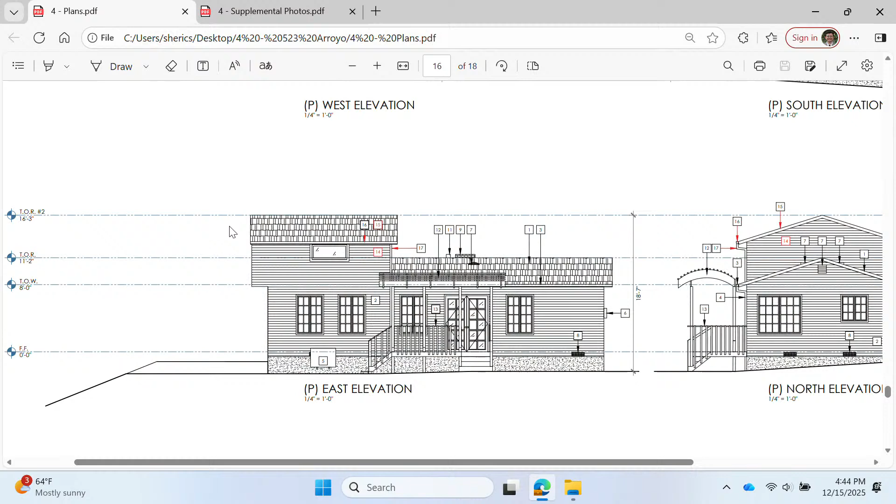Can you, on the south elevation, could you just go to the elevations again? I wasn't seeing the cantilever. I think that the south elevation cantilevers out over, and yeah, south elevation. And then it's seen on the east? Yes, so the east—if you're looking at the south elevation, it's cantilevered, and that's where those transom windows are that follow the rake, I think.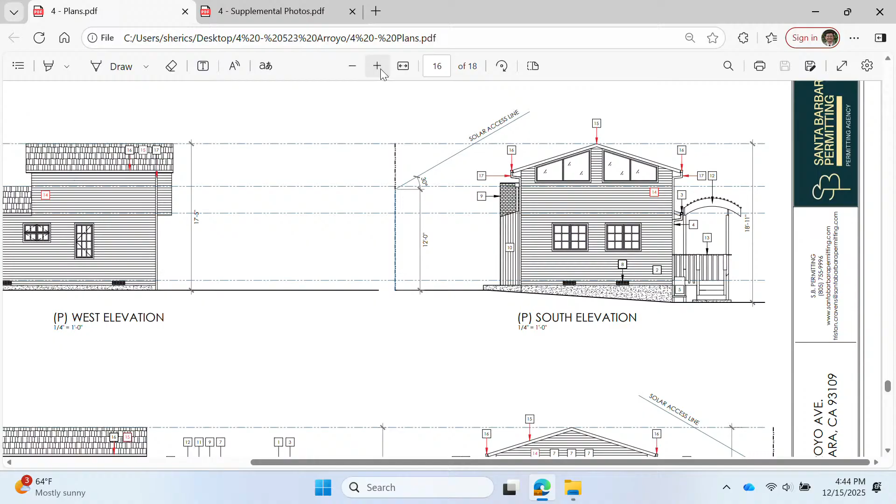So if you go to this proposed south elevation, the upper right, where's the cantilever? It looks like a dark line just below the dashed line. I think that's because of the hatch—looks like siding. It's at the floor level though, but I'm not sure how it could be. I'm going to zoom in—use the touch screen if that helps. No, there's a dark line just below it. Oh, it's a bit unclear. So the blue line, apologies—is that the finished floor level of the upper level?

I believe so—the dashed line is the floor level, so it looks like a few inches of floor framing there. Yeah, it might be a photo graphic error more than anything. Oh, I see—it can also look like it's the section, right above the window. Right, I can also show the section here, outside, if this is helpful.

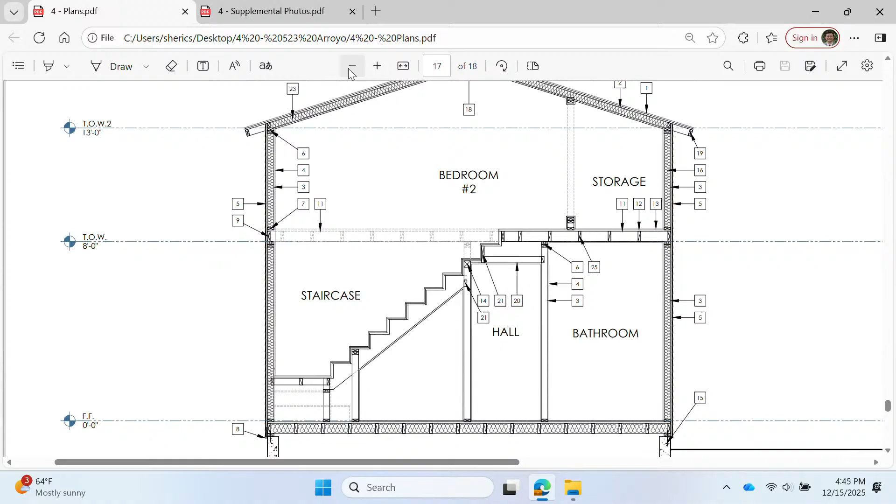That doesn't help me, but okay, I'll show the photo. It's all right. And then there's a house to the rear, 521 Arroyo. Can you show me on the site plan the adjacent house to the rear of the property?

Right, maybe this would be most helpful. This is an aerial shot. I believe 521 would be here, correct? All the way down, there's more house. Oh yeah, down so here, it's behind the neighboring property.

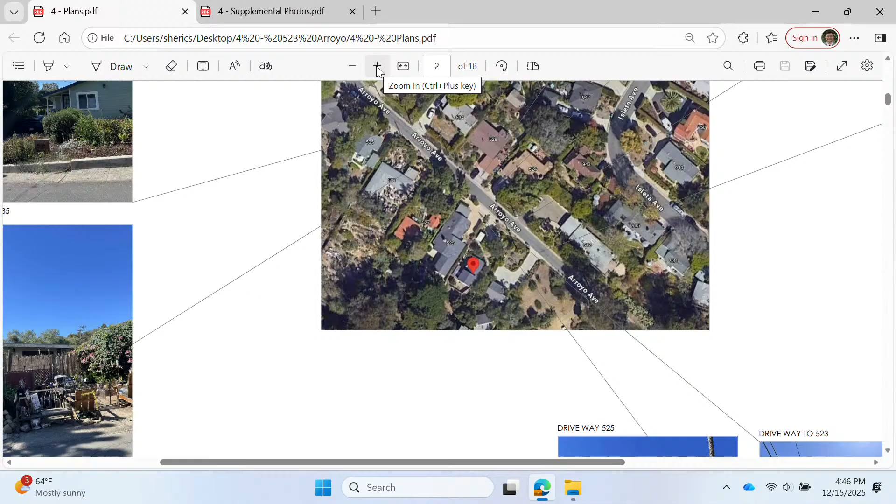Through the chair to the applicant, I have satellite imagery I can bring up that gives a bigger site map, because the properties are pretty big up there. Can you switch to my screen, please? Do you have any imagery? It looks like there's some tree vegetation, so I don't even know if you can view that portion of 521 that Vice Chair Sherry's pointing to, but do you have any photos from that viewpoint to see if the second story is visible to them or they're visible to you?

To clarify, if you can see my mouse, are you asking about here? Yeah, it's actually exactly behind the neighbor, not behind them. Now I get it. Okay, yeah, it's all right. I think I'm okay, go ahead. All right, no more questions.

Any questions? Just confirming, I think I just saw it in the plan, but the shipping container is to be removed, okay great. And then I was going to ask you about viewpoints from La Marina, but I don't think there's anything there. Let's see, no, I'm good.

Thanks. Board Member Mosley? Can you go, please, to the elevation you're showing the demo, the red dash lines?

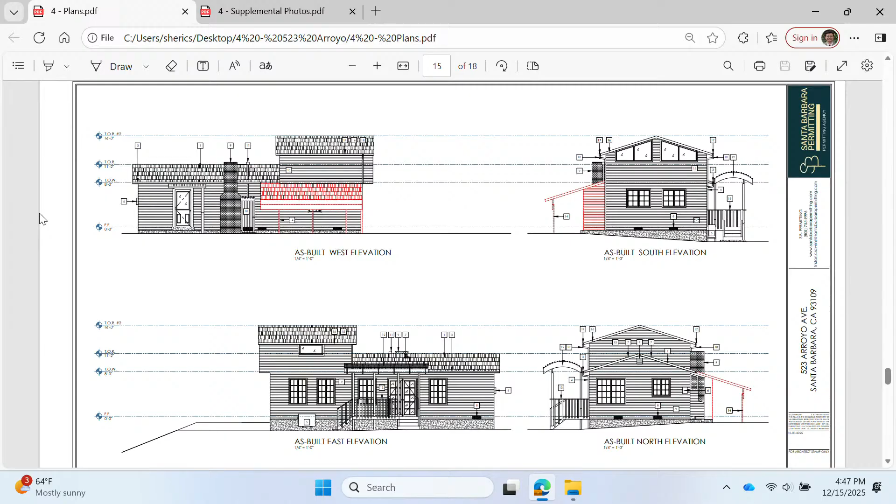Here. And so from my understanding, this number 14, which is the metal pole, is it already removed or is it going to be removed? It's going to be removed. Can you show us on images? Oh, is it the curved one? It's not, no, oh yeah, here. Can you show us on images?

East elevation 1 photo, is it on here? There's a few, scroll down through the rest of the neighborhood, and there might be one in there. If not, I can email one, no problem. Keep going slow. A little further, right here, there it is. Is it this one? Yeah, where you see the green tarp, just to the right. Okay, yeah, just right here.

And on your elevations, like the second story, you have some notes that say siding to match existing. Is it going to be updated, the red notes that you have, to the matching siding, or is it already been updated? Already, because it's an as-built, that's how you're numbering. Okay, so exactly, there's not going to be any change? Exactly, okay, I think that was all my questions.

Great, okay, Board Member Richards? Sure.

Maybe it's a graphic thing, but it seems like your chimney is sitting a little low. My only concern is, with that second floor being built without a permit, is it at the appropriate height? Is it seismically braced? As part of construction, is it going to need to be modified? Well, I think it's better represented in the photos on site here. It's unfortunately not extremely clear, but I believe in the plans we have it cut off here in the elevations. So there's an additional flue that extends up higher. Yes, that's right. But we can definitely add that to the plans to better represent that.

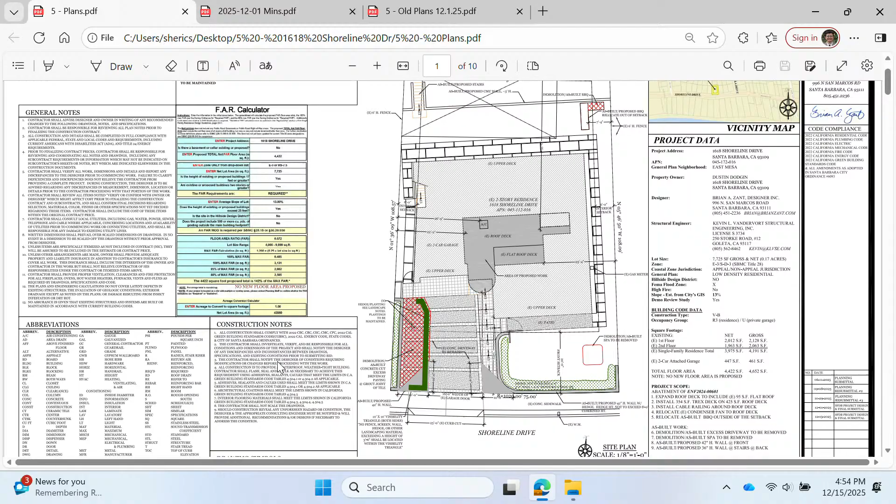So Dustin and I met after the meeting and decided that we were kind of fighting against ourselves with the proposed cable railing, although it's a common solution in the coastal area. We felt that maybe it was fighting against each other, which was a comment from the board. When we came up with a solution to do the curved railing in wrought iron, we really liked that because we felt it fit in more with the character of this Spanish Mediterranean home. So we decided to go in that direction.

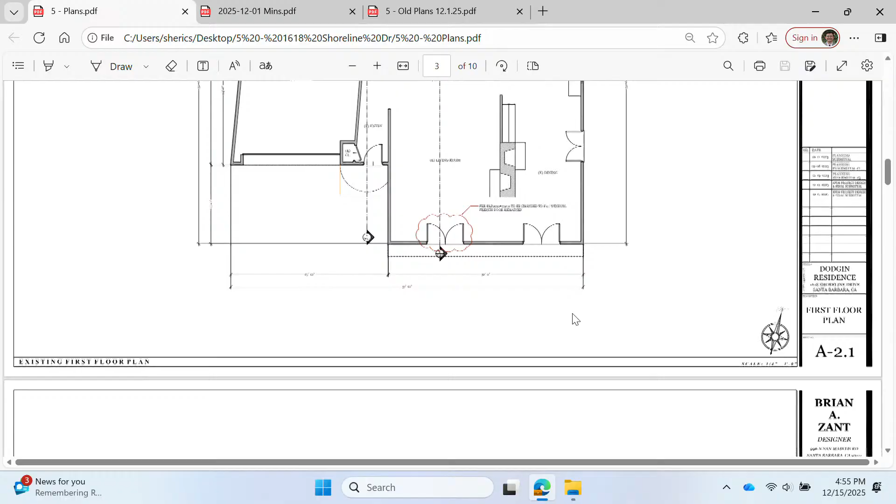I want to point out that roof decks are real common in this neighborhood. We've got those on Santa Cruz and 130 Santa Rosa. We came across, while Dustin was going for a walk, 1510 Santa Rosa, which was actually reviewed by this board. We watched that meeting, and they had some of the same aspects of design that they were able to resolve with a cohesive design. So we took that as guidance for what we wanted to do to make a more cohesive and balanced design, specifically to connect those two decks.

We do like this layout that we have here. It's nice for casual use, not going to be a big party deck. This lower deck area is a really nice place for watching the sunset. So we're trying our best to incorporate a design that can still allow us to keep that as-built condition.

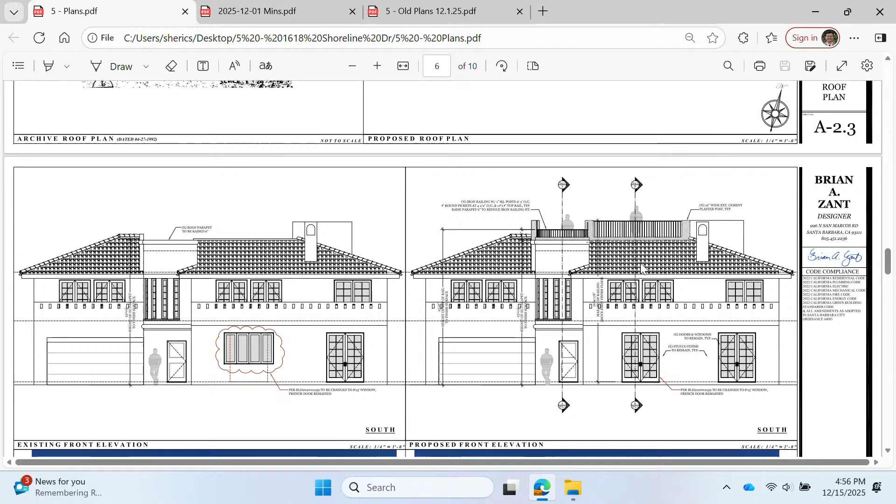So what we've decided to do is add pilasters. These are darkened here, but of course they'd be white stucco to match the existing—I just wanted to show where we're adding those pilasters. We've decided to go with a wrought iron railing detail, switching to round half-inch posts, pickets, and a very minimal top rail, still trying to minimize the effect on the view but keep that Spanish Mediterranean character.

There was a rendering that we decided to put together real quick to show you.

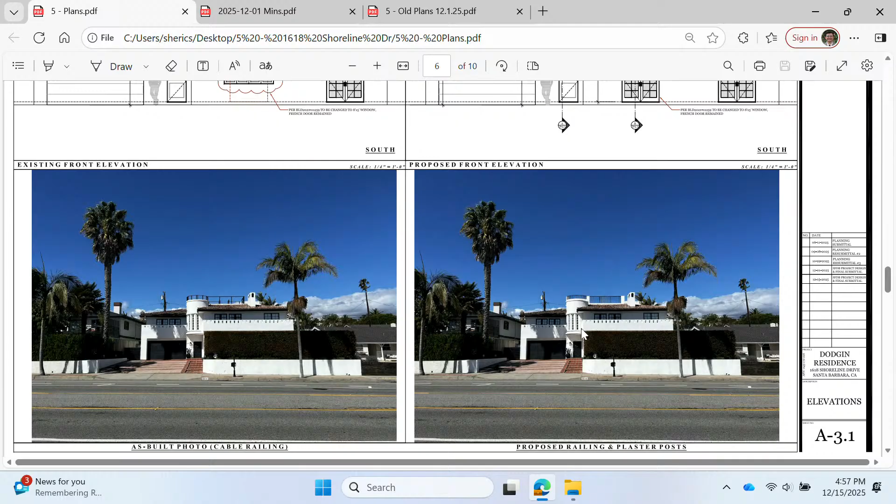Felt that the pilasters were able to close off those railings and give an endpoint to them without adding too much to the mass and bulk of the roof deck. Felt that was an elegant solution that fit into the existing style of the home, and even improved it.

It also allowed us to come up with an architectural detail to resolve that step down, which was admittedly an issue in our previous proposals. So what we'd like to do is have a curved wrought iron stair railing with a nice lamb's tongue detail that helps with that transition and adds an architectural detail we find quite handsome.

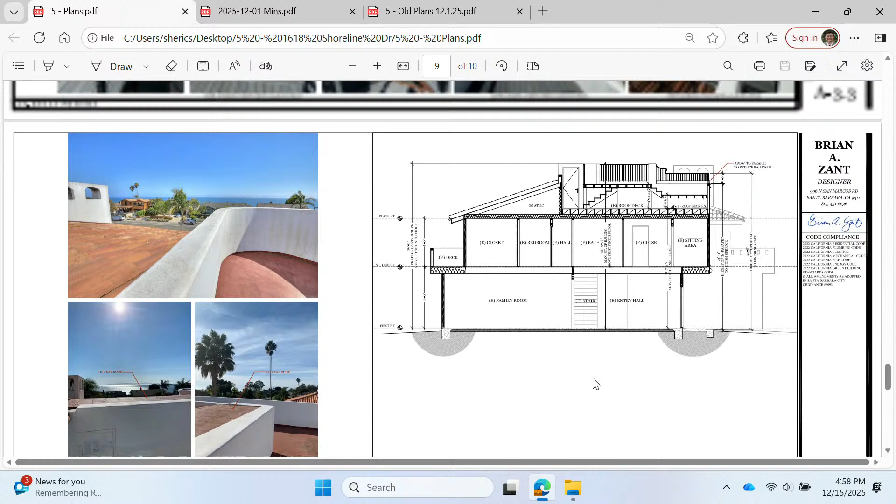That detail for the lamb's tongue would be on both sides of the railing. This is the section cut looking at the lamb's tongue on the eastern side, and this is that section. And this detail shows the section on the western side.

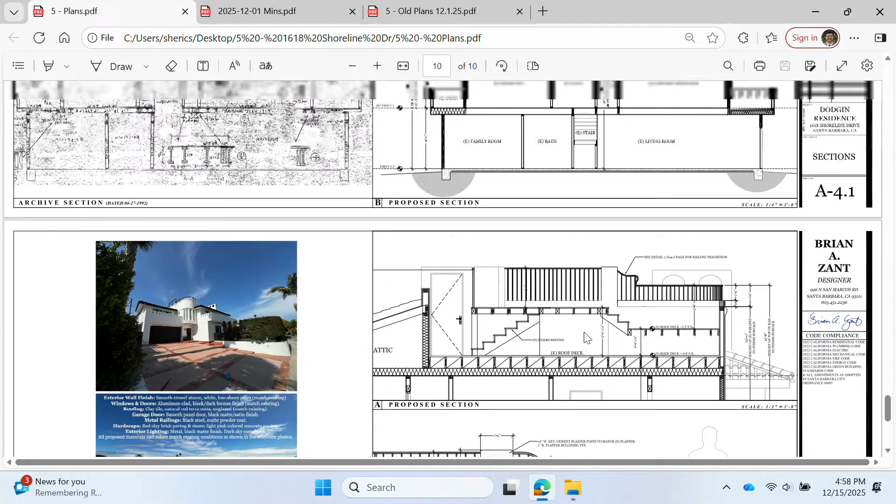We've gone over this project several times, so do you have anything to add, Dustin?

No, I'm a lot more excited about the design and the look, and in speaking with my neighbors, I think they supported me as a neighbor before, but now they more support it as a design concept, and it really improves the design of the house, even better than before. So that's it, and I really appreciate the continued support and walking through your concerns, because it helped us get here, which we're pretty excited about.

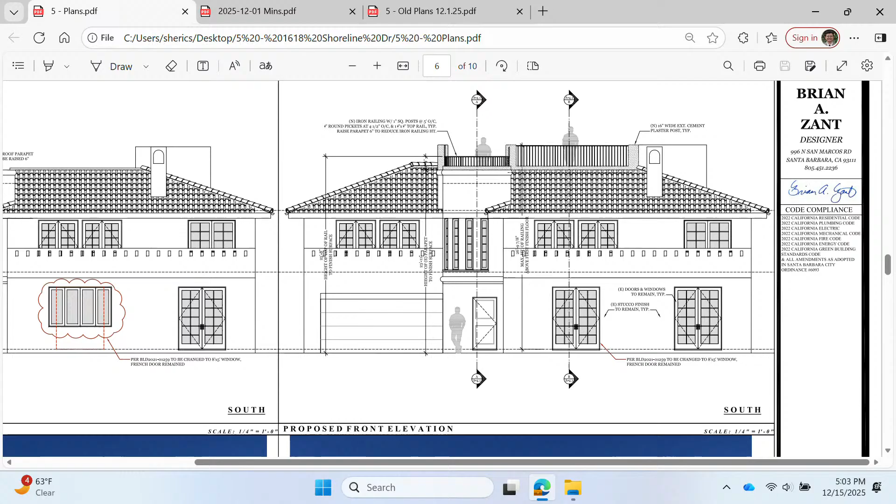Can you go to your south elevation on A3.1, and zoom in please? I can support both with pilaster and without. If you end up keeping the pilasters, like Chair Louise was saying, the long railing hits where the top of the pilasters are kind of curved, so it's not a constructible detail. I understand that adding this massing resolves the corner transition railing situation, which was a little funky, and it resolves very well on the west elevation. But on the front elevation, I can see maybe having the right one at the end but skipping the middle one, if the railing connecting is the same height. Right now it's a little bit different.

Regarding the 6-inch curb you've added on top of the curved cylinder, I can see from this elevation that the 6-inch is added on the long elevation as well, so they're aligning. From the rendering elevation, the street view, the railing appears taller, more massing might help perceive it better, but I think with the 6-inch aligning geometrically as it is now, I support this. It's up to you whether to keep the pilaster or not.